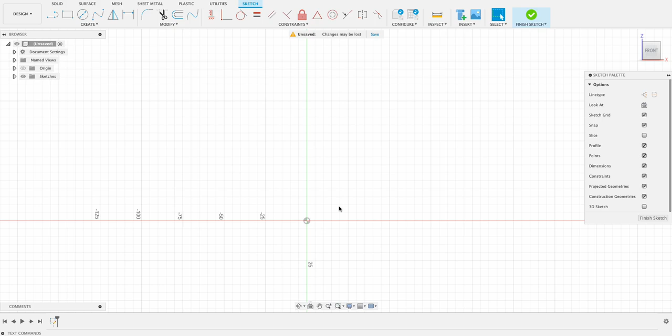I'm going to start with a rectangle, so R for rectangle, or you can click up there, and I'm going to drag this out and make it 4 millimeters thick and 35 millimeters wide, and press enter.

Now this is going to go up to 100 millimeters high and be 80 millimeters wide at the top, so I'm just going to draw a construction line.

Click there or push L and snap it onto this origin, the y-axis, the z-axis there anyway, and that's going to be 40 millimeters. I'm just going to make that a construction line.

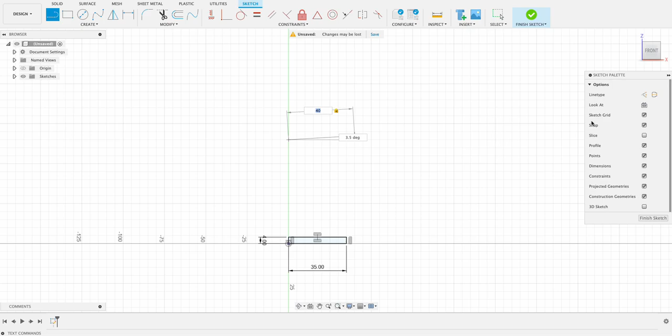Okay, so we've got our construction line there. Now we're going to take our spline tool, because I'm going to want this to be a bit of a curve, so it's going to kind of curve in and then back out.

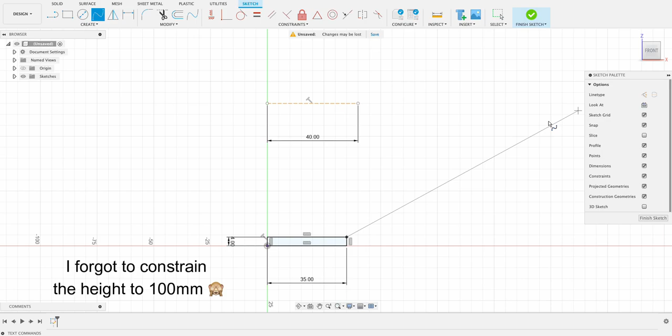So I'm going to snap to this point over there. Let's turn off construction line, and we'll just curve it to that point. I'm quite happy with that curve.

If you weren't, you could always drag it around to move the points, or click on the handles and just adjust it how you want. But I'm happy with that initial curve.

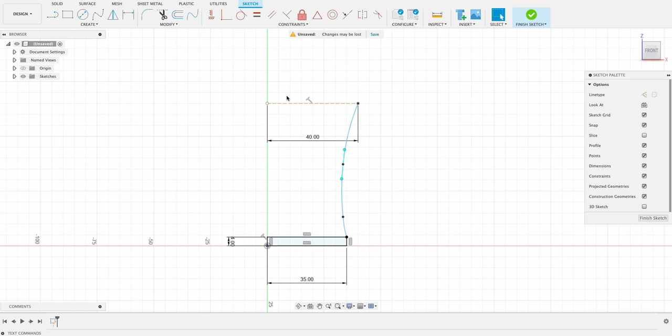And then I need to make a closed profile out of this, so I'm going to do offset tool, select that line, and this is going to be 3 millimeters. I can see it's offsetting from there, so that's great.

But I need a closed profile here, so I'm going to use a line tool, L, and draw a line from this point horizontally to that point. Now we've got that closed profile.

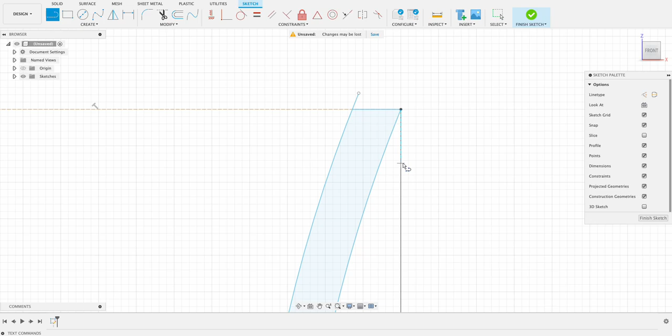I'll just trim this, so you can push T or click on the scissors, and there we get that. And then at the bottom here we'll do the same. I will trim that and trim that, and there we've got our profile for our mug.

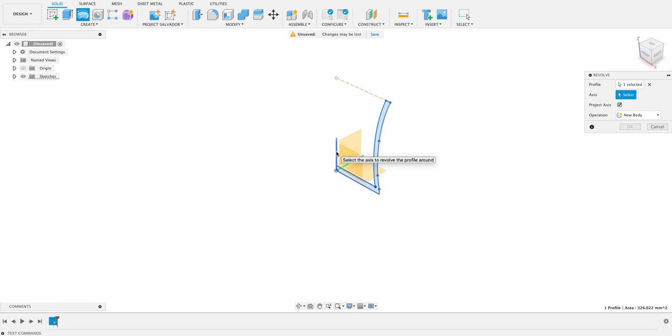Now we're going to select revolve, and we'll select the axis, and there it's going around the axis for us. It's quite a chunky mug. You could always make it a bit taller or whatever you want, but I'm going to be working with this.

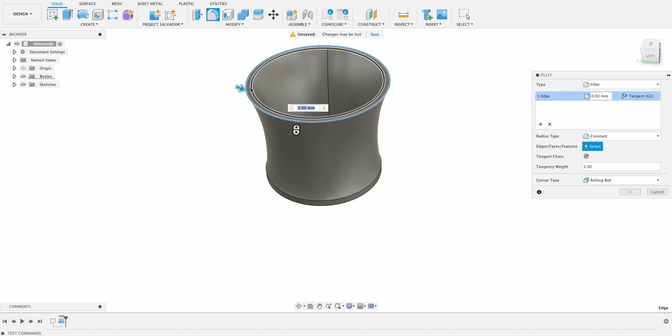At the top here I want to add a bit of a fillet, just so that it's a bit smoother, so I'm going to create a fillet. Select these two and maybe make it 2 millimeters.

Nope, 1 millimeter. So 2 millimeters, it gets the whole cup. So 1.5 is fine because it's a 3 millimeter. So this should be roughly a full round over there.

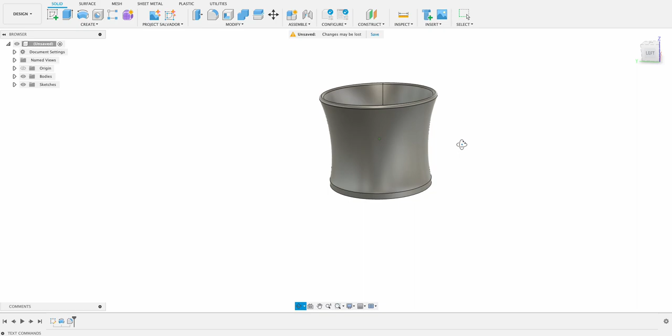Okay, our next step is to create a handle for this mug. To do that, I'm going to, on the front plane, create a sketch. And it's going to be a path that we're going to sweep a profile along to create the handle.

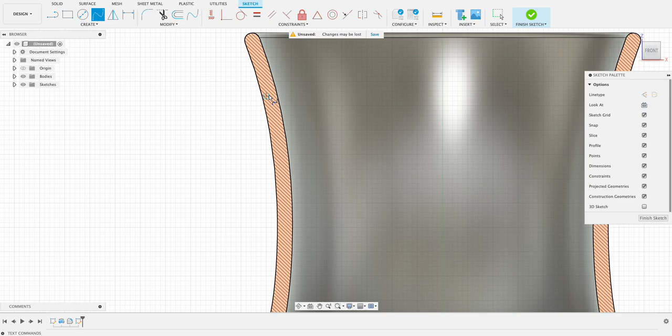I'm going to press slice here so that I can see inside. And we're going to go to, again, spline point. And I'm going to want this sort of inside the cup so that our sweep ends in the cup.

And there, I'm happy with that. Again, if you do want to adjust something, you can just move it around like that. You can also do it afterwards, after you've done your sweep, you just go back. We can have a look at that as well. Finish sketch.

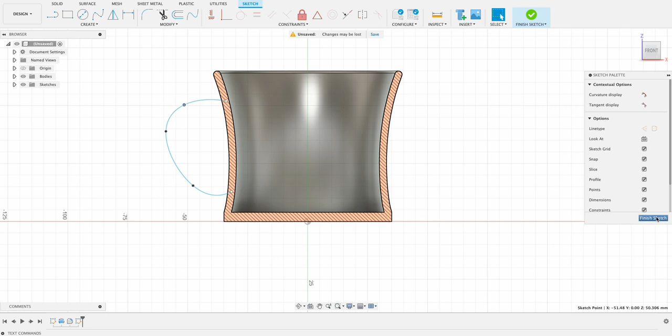Now we need to create this profile. So I'm going to go to construct and plane along path, select that path, and slide it all the way back as far as it can go. I don't want to start my profile in the middle, then I'll have to do a sweep in 2 directions, so it's good like that.

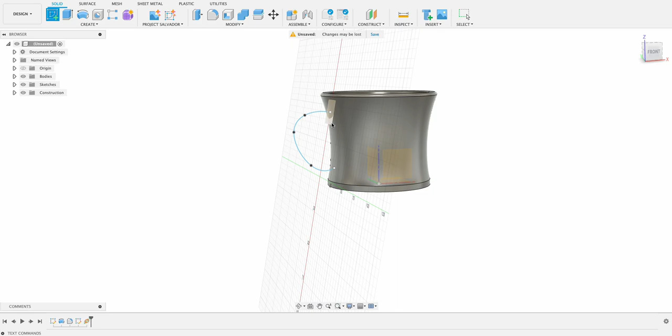And we'll go back to create sketch and click on our plane that we just made. So you see it's got an origin of this plane right over there. That's where we're going to be drawing our ellipse. So we'll create, click on ellipse, and we'll draw that out to 10 millimeters. So 10, just locked it in place there for us, and 5 millimeters wide. So that's the shape of our ellipse.

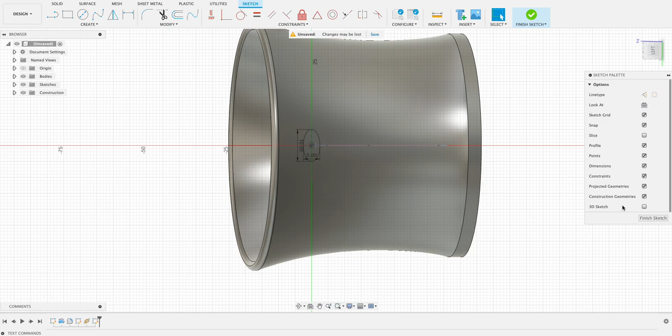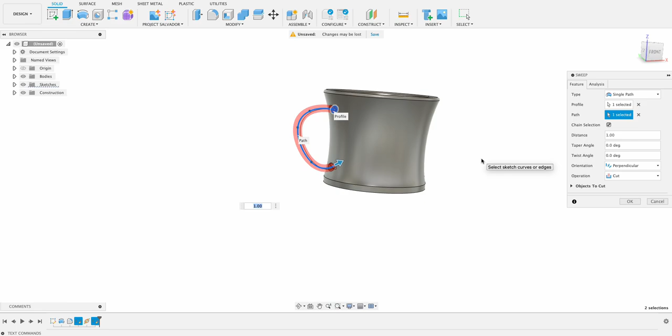Now we go back to create, sweep, and we've got to select our ellipse. And next we select the path, and that'll be this path that we just created. We can see that goes into our cup, but it's a red line. It's trying to do a cut operation because you can see it intersects the body. But I'm going to change this operation to join, and there we've got our handle.

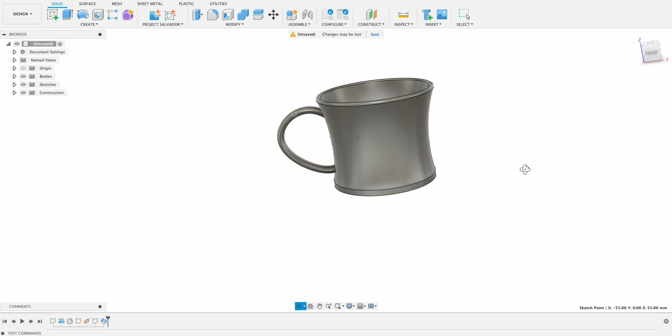Click OK. Now, like I said, if you wanted to change the shape of that handle, we can go into our handle path and adjust these lines. Obviously not too extreme, or else it might distort it and the sweep won't work. But there we can see I just did a simple update and we've got that. But that's not what I'm looking for, so I'm going to go back, make this a bit smaller. I think that's something like what I had it. I'm quite happy with that.

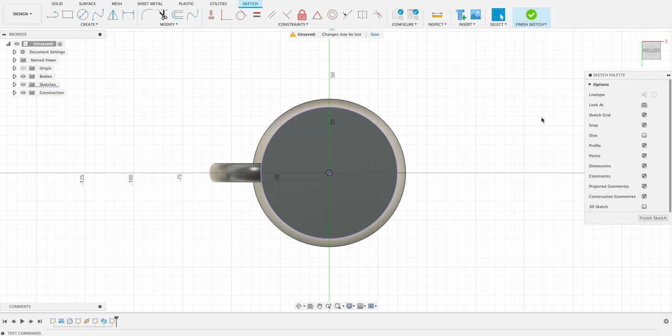Next I want to create a little lip at the bottom, so I'm going to go create a sketch. Nope, let's just delete this. I'm going to create a sketch on this bottom face, so I'll select that face, and I'm going to do an extrude into the cup by 1 millimeter, so there's sort of an indented surface there. Either I can do a circle, press C and drag it out, or I can do this and go P for project and project this line over here, and we can just do an offset of that line, and I know it's going to be exactly what I want. Finish sketch.

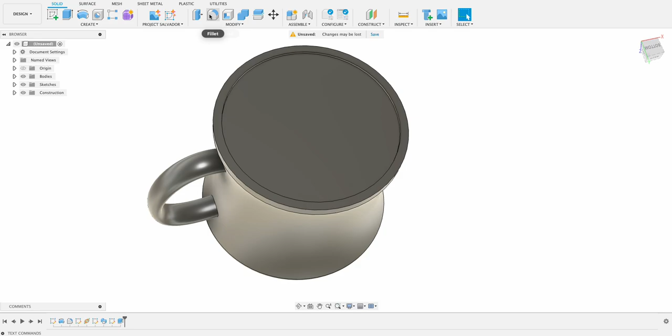Now we'll extrude this in by -1 millimeter, and we've got that little indent there. If we want, we can add a couple of fillets in here. Let's see if it gives us a 1 millimeter all the way. There we go. So now it's got a smooth look to it.

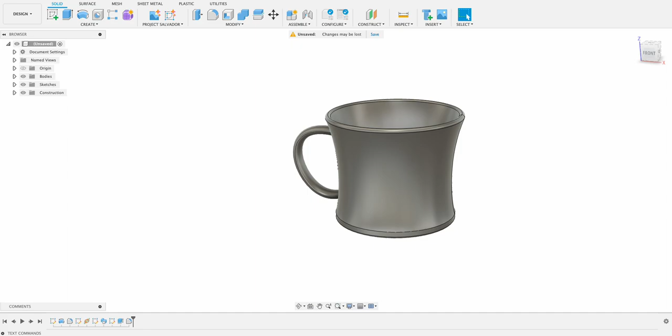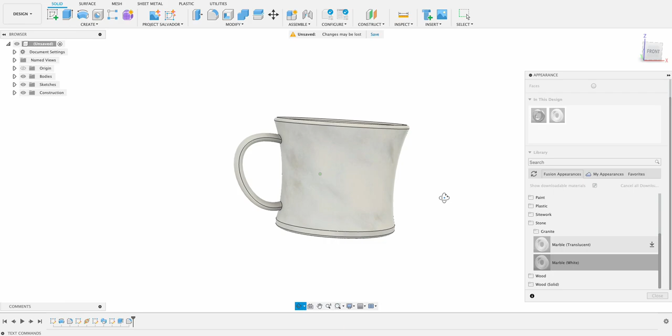Last step is to add an appearance. So I can either right click on it and click on appearance, or I can push A and it'll bring up my appearance menu. Here we've got a bunch of different options, but what I'm going to go with is this marble. It kind of looks like a China tea set kind of vibe. So we put that on there, and there we've got our mug. I'll click close there, and there's our finished product.